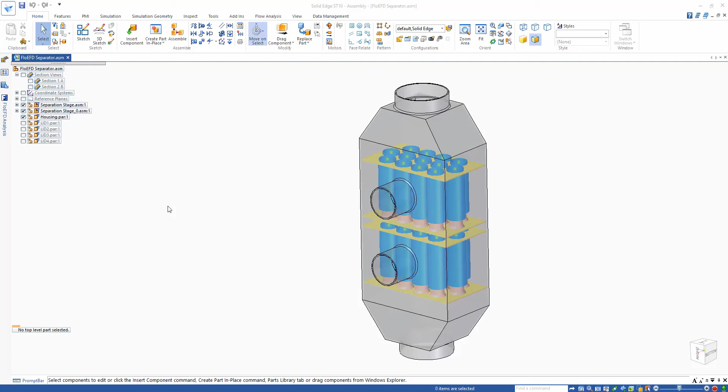Hello and welcome to this FloEFD example where we're going to be looking at a cyclonic separator in FloEFD, where we have an air inlet, two outlets for the cleaning stages, and a third clean air outlet.

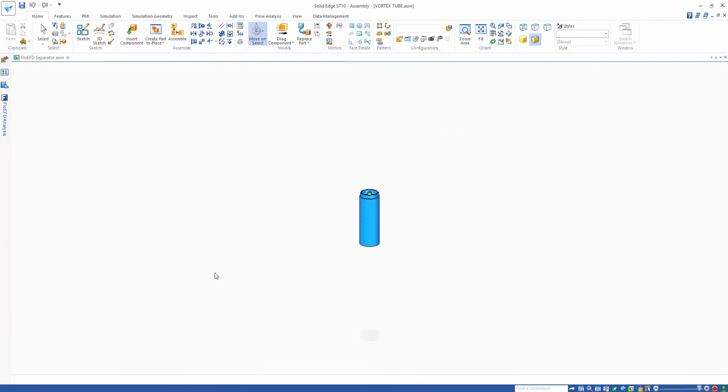This is a passive device using vortex technology, and let's have a look at some of the design behind this particular separator. You can see that we have a single spiral that's going to be forcing air towards the outside of this vortex tube.

We can understand that the particles are going to be flung outwards and then separated from the flow as it goes through the device.

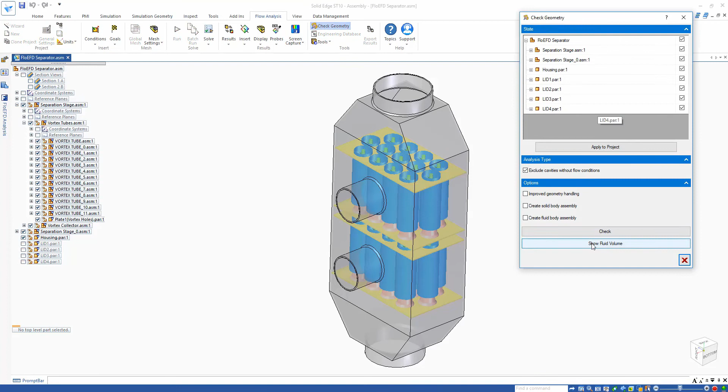In FloEFD we can check the geometry to ensure that we are getting the correct fluid region in the model, so the air cavity or air volume is correct. You can see on the screen this blue volume, which is the correct air volume, so we're ready to go.

Let's go to our FloEFD analysis and look at some of the setup. First of all, we have 100 CFM on the inlet. We then have three pressure outlets: the first stage of cleaning, the second stage of cleaning, and hopefully the last clean air stage right at the bottom.

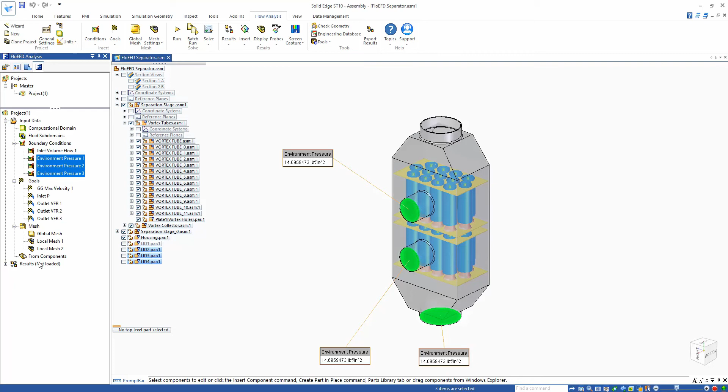So let's load the results. First of all, let's take a cross section. We have that there, and we can have a look at what the computational mesh looks like.

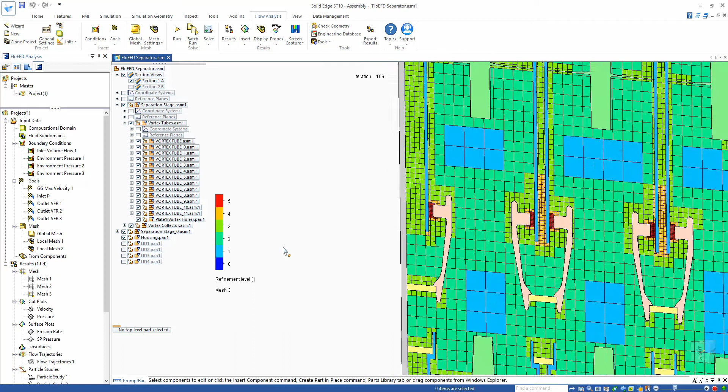FloEFD uses a finite volume mesh, and you can see we have coarse regions on the inlet, medium regions around the spiral, and then a very fine grid region in red on the outlet of each vortex tube.

This indicates our separation zone, as the particles are sticking to the outside of the vortex tubes. So that's what the computational mesh looks like.

Let's have a look at the velocity through our model, and I can probe that now and get a feel for what sort of velocities I'm going to be getting through the model. Right, so we can see velocities there, and on the outlet as well I can see what sort of velocity I'm going to be getting.

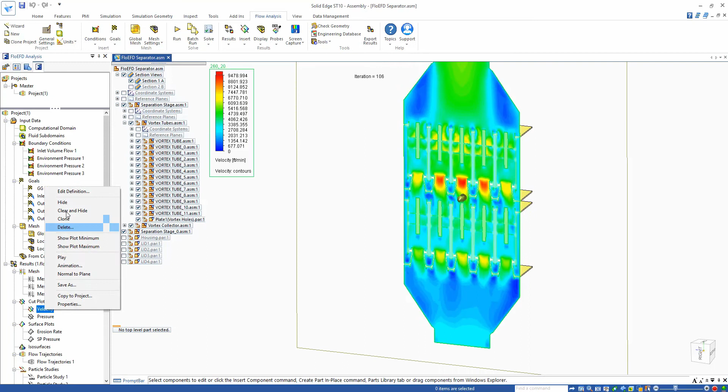We can also have a look at what the flow pressure looks like. So to maintain that 100 CFM, what's the delta P got to be? Well, we can see the inlet pressure and the outlet pressure, so maybe 0.18 psi or so upstream pressure is required to maintain that 100 CFM through the unit.

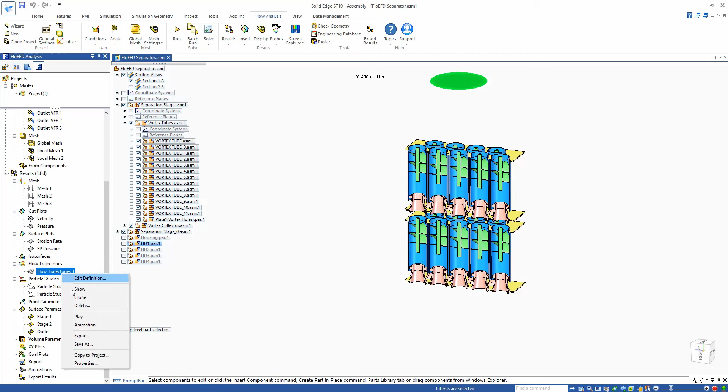We can introduce and look at some zero mass particles into the flow just to visualize what the airflow looks like. You can see there we can actually play these, bring back the housing, turn off the section.

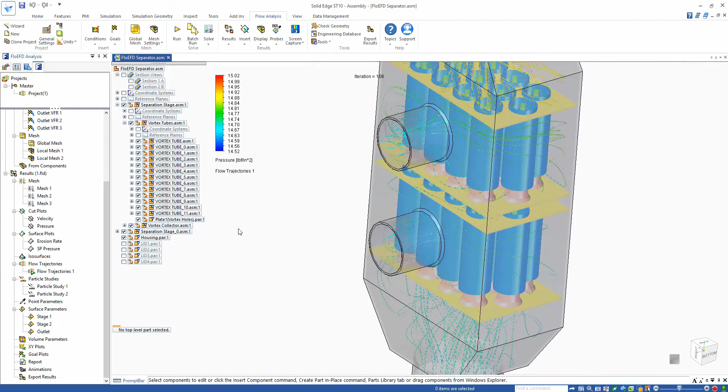You can see what the flow trajectories look like as it goes through the model. I can take this section like this and we can see the flow with these zero mass particles.

Because we want to understand what the separation efficiency actually looks like, we can use something called a particle study. So let's activate this particular particle study.

Now I've got three injections: 50 micron, 5 micron, and 0.5 micron injection into this model. If I just edit this, you can see this is going to be a 50 micrometer injection with 1,000 particles.

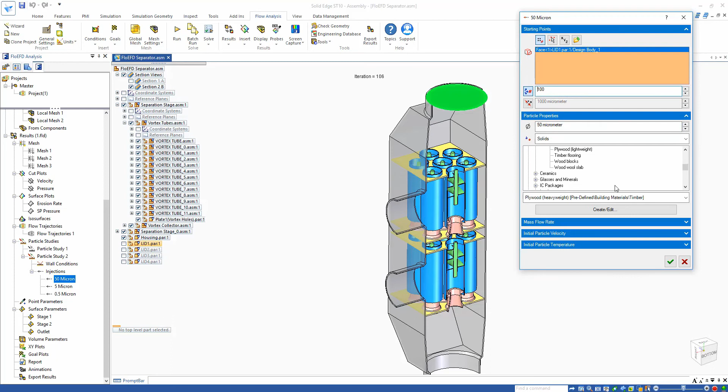I've got a plywood material on here at 50 microns, and we want to understand what the flow looks like. So let's just activate this.

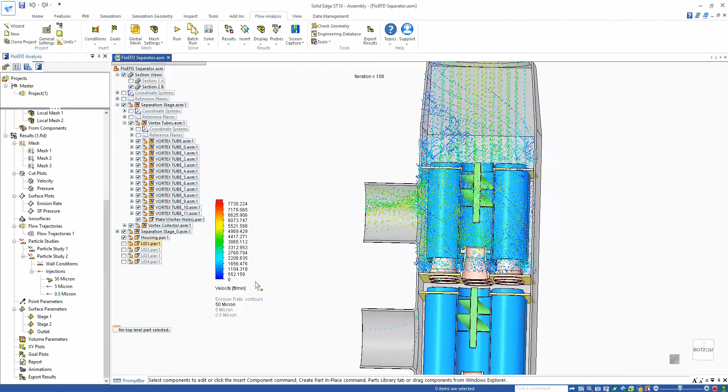If we show that now, right, so we can see the particles coming into our model. This is colored by velocity. You can see there is the swirling effect as it goes down.

You can see how they're sticking to the outside of these vortex tubes. There's no moving parts in this, completely passive device, and then you can see how it's being separated and moved out towards the outlet of the first stage.

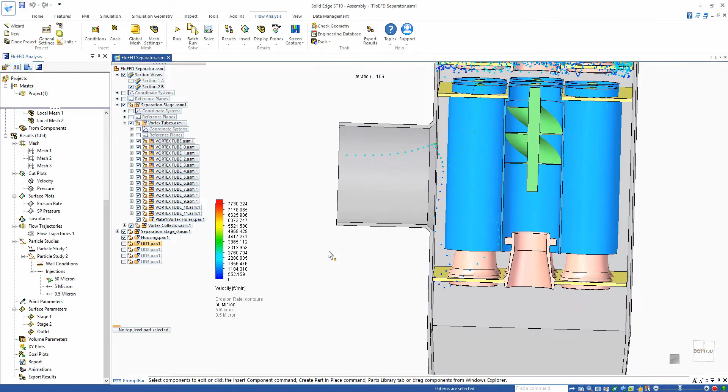A little bit gets through to the second stage, but not as much as the first stage. So the separation efficiency is pretty good for 50 micron particles.

Let's have a look at what happens at 5 micron. Alright, so we're getting a little bit more. The first stage is taking care of most of it, but the second stage gets a little bit more through this time, and finally a little bit more gets out towards the outlet as well.

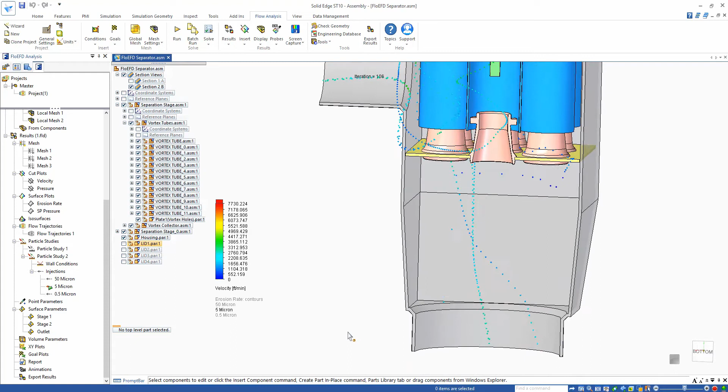And then finally let's have a look at 0.5 microns. What does that do? Well, we don't get a lot of separation in the first stage, and a lot more going through to the second stage.

But in the last stage, there simply isn't enough mass in those particles, so the separation isn't as great for these 0.5 micron particles going through our separator.

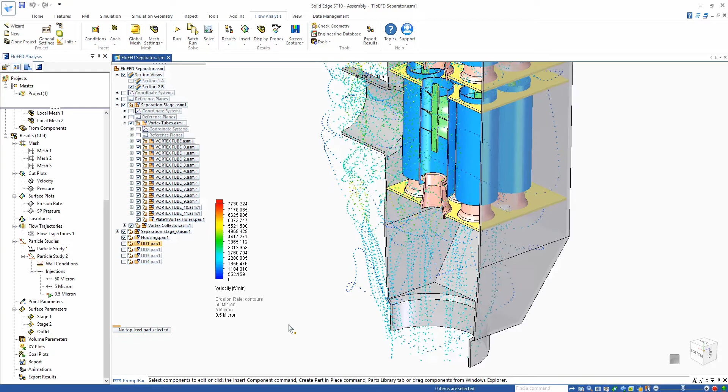So we can get a feel for exactly how good the separation efficiency is. The way to visualize that is to use surface parameters.

So if we look at stage 1 and actually show what that looks like: in stage 1 we're removing 98.5% of the 50 micron particles, 93% of the 5 micron particles.

But for the 0.5 micron particles, we're only removing 32.4% of those particles out of 1,000.

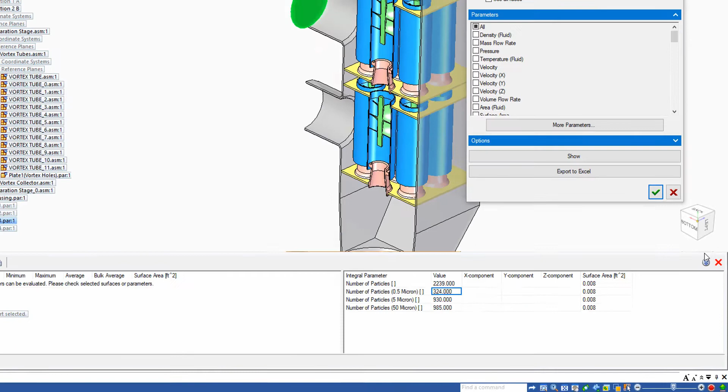And then finally, if we look at the outlet to understand how many particles are going down there, we can see that only 0.1% of the 50 micron particles are getting through, but for the 0.5 micron particles, it's quite different.

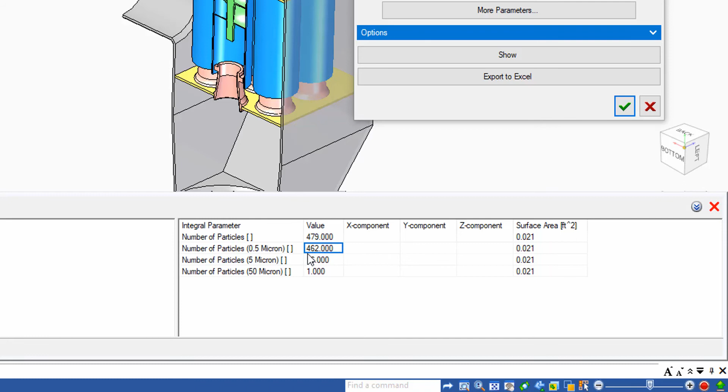You can see 462 of the original 1,000 particles are getting through at 0.5 micron, so only a 53% separation efficiency at that size.

Finally, let's see what sort of erosion rate we're going to be getting on our spirals, to see how many particles are actually hitting those surfaces.

That shows you which particles are hitting which surfaces and where, and how badly the wearing effect is going to be due to the particles going through this particular system.